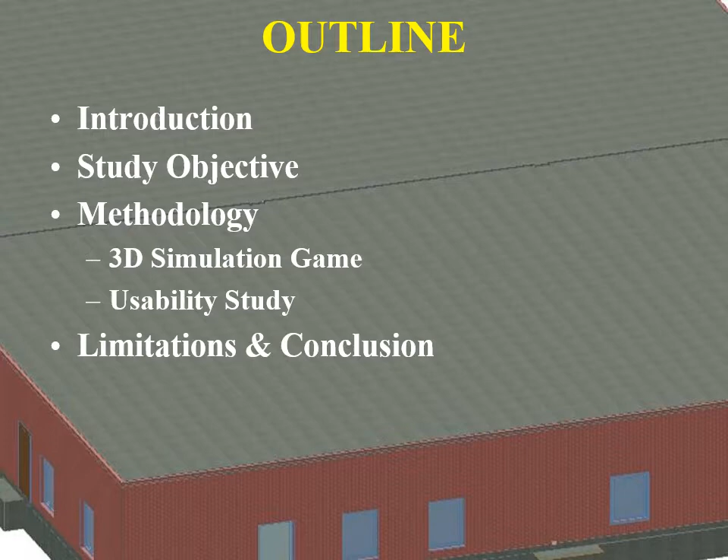Coming to the motivation of this project, I have been teaching this concrete course for some time. This course focuses on design, material takeoff, and construction aspects of concrete formwork. 3D visualization is a very useful tool to teach these concepts to students. One approach to facilitate 3D visualization is to incorporate site visits.

For the last two years, COVID has forced us to adopt online teaching and site visits have been rolled back. Even before COVID, we had challenges incorporating site visits in the class because of scheduling. Because of this lack of site visits, students are not able to visualize these concepts, and it is disengaging the students.

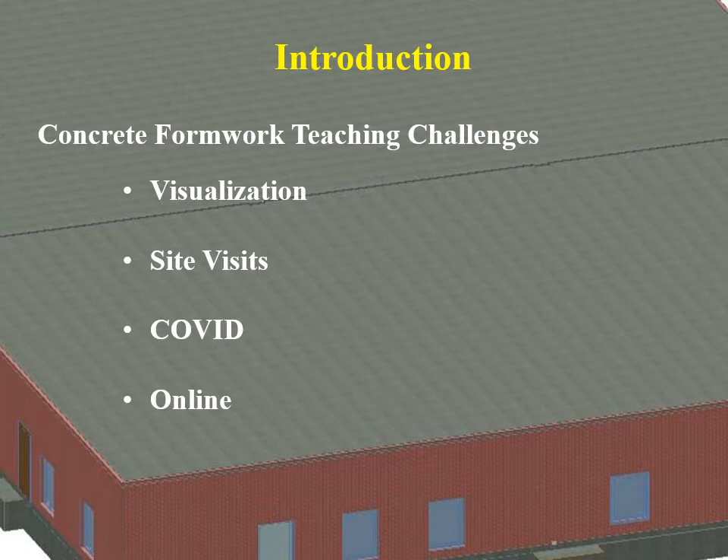So how do we address these challenges? To address them, we thought, let us use a 3D concrete formwork simulation game in the course. What are the advantages of this simulation game?

This simulation game will create visual and kinesthetic learning environments, and it actively engages students in the learning process both in-person and online. This visual-rich learning environment will provide students the required visualization skills and enhance their performance.

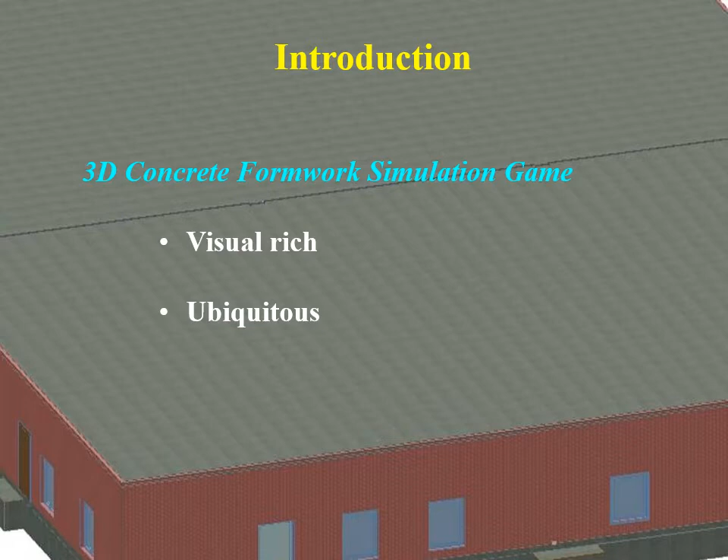This game will help create a ubiquitous learning environment. For example, anytime access facilitates students to learn at their own pace and promotes a learning environment beyond classroom boundaries.

Coming to the objective of the study: to develop a 3D concrete formwork simulation and explore its usefulness in teaching the design, assumptions, material takeoff, and construction aspects of concrete formwork.

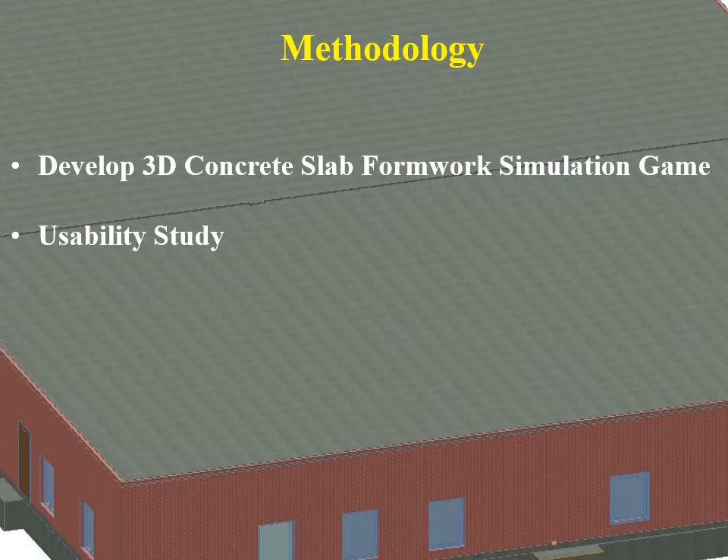So the methodology includes two steps. The first step is developing the concrete formwork simulation game, and then evaluation and usability study. Let us see the development process of this simulation game.

In this simulation game, we developed the slab formwork concrete game. The typical components of the concrete slab formwork include sheathing, supported by a set of beams referred to as joists, which are in turn supported by a set of beams referred to as stringers, and the stringers are supported by a set of vertical members referred to as shores.

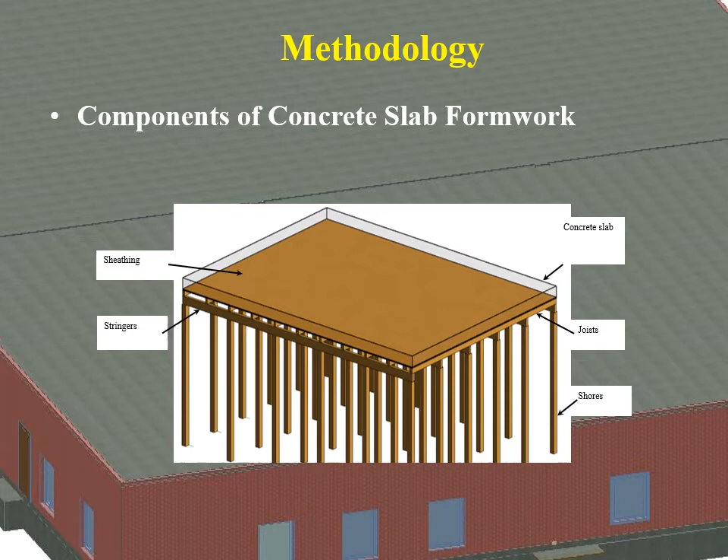Using these assumptions as our case study, we developed the game. In this development process, the sheathing was designed using plywood, and we used lumber for joists, shores, and stringers. The game was developed using Unity 3D software.

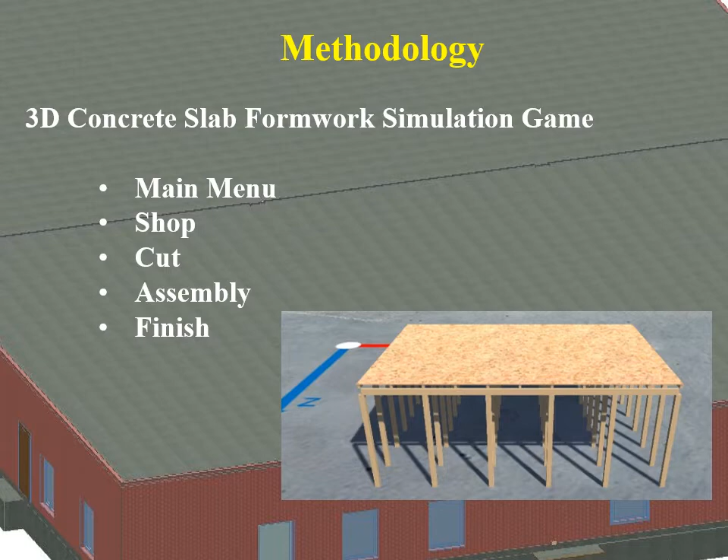It has 5 modules: the main menu, shop module, cut module, assembly module, and finish module. Let's go in detail about these modules.

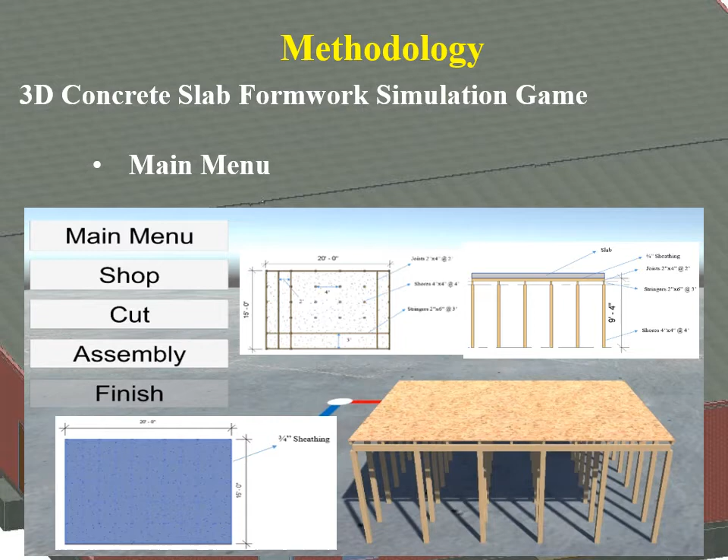On the main menu, when the player enters, this is how it shows—a screenshot where they will be able to see the elevation views and plan views. Using this, the user will be asked to estimate the material takeoffs.

It also judges how well the student maximizes the usage of these components to reduce wastage. For example, the player will be asked to input the amount of each type of material they believe is necessary for completing the formwork with as little waste as possible, without having to return purchased materials again.

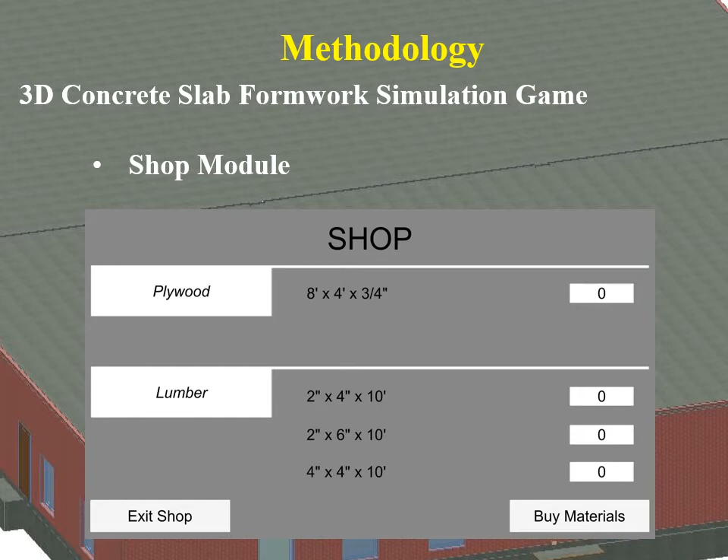The sample screenshot is shown here, where students will be able to enter the quantities of these different materials. Once they enter, they will hit the buy materials button.

Once they purchase the material, they have an option to go to the cut module. This component will help them cut the material to the required sizes needed to build the formwork, so players must account for the excess material needed for proper construction.

Based upon the purchased materials from the shop module, the player is presented with the amount of materials purchased. Using these materials, they will be asked to cut whatever lengths are needed, entering the sizes of the materials and the number of pieces they want to cut.

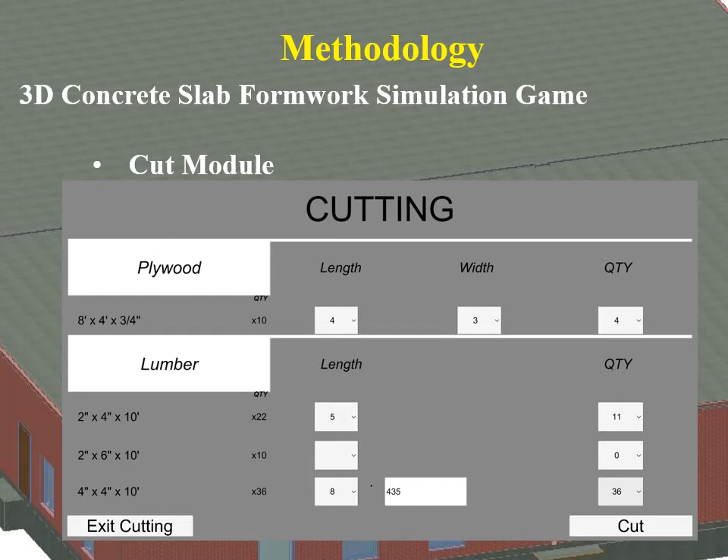The material stockpiles will be dynamically updated as the player utilizes the material. To guide students on where material has to be placed, a ghost image of those components is displayed in blue color. When the student snaps the component, the material changes to its assigned color on those components.

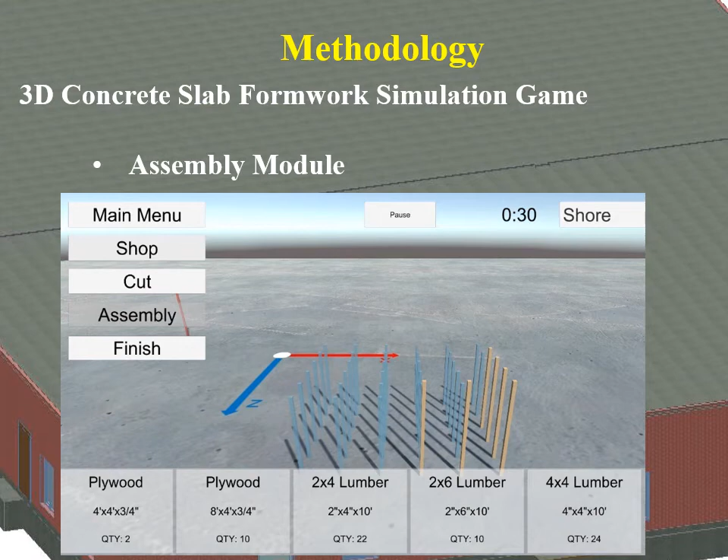The player will have an option to go to the cut module or shop module depending on their needs. However, each visit will contribute toward a penalty. So, coming to the results module, it will be able to show the results of those.

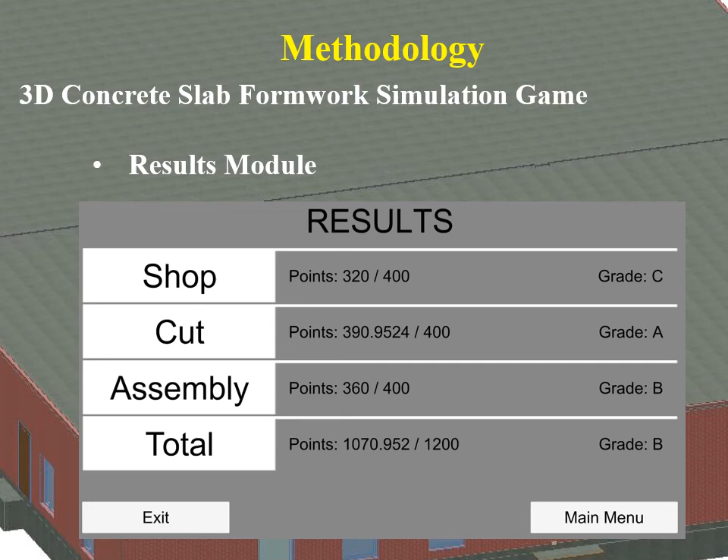The game has been evaluated by conducting different play test sessions. We conducted around 12 play test sessions, and the students were asked to play the game and then take a survey.

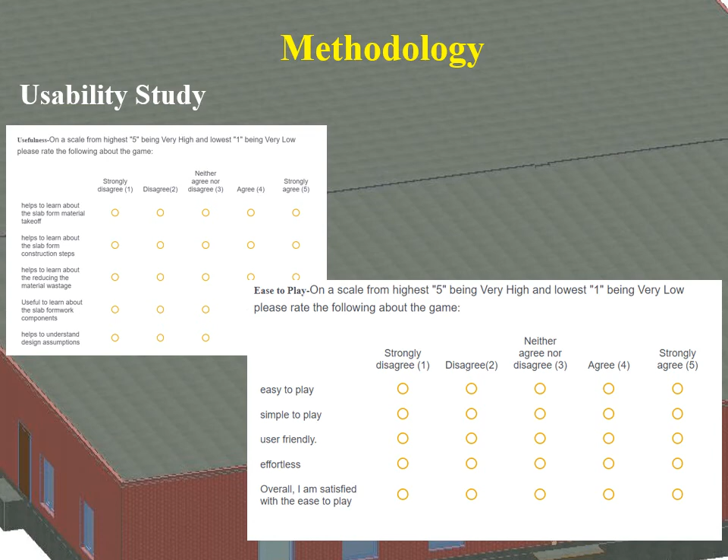We asked them to assess the usefulness of the simulation game, and they were asked to rate their satisfaction on a five-point Likert scale, where 1 is strongly disagree and 5 is strongly agree.

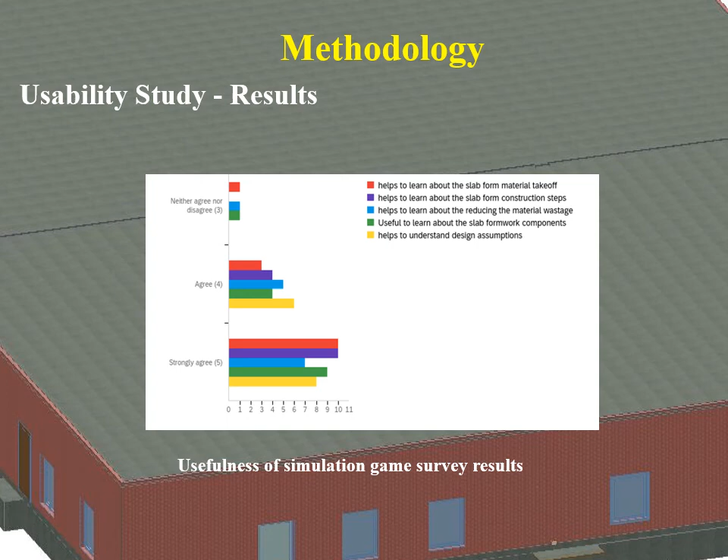The survey results show the usability study results like this. As seen in the figure, most of the students agreed on the usefulness of this game in learning their concepts about formwork.

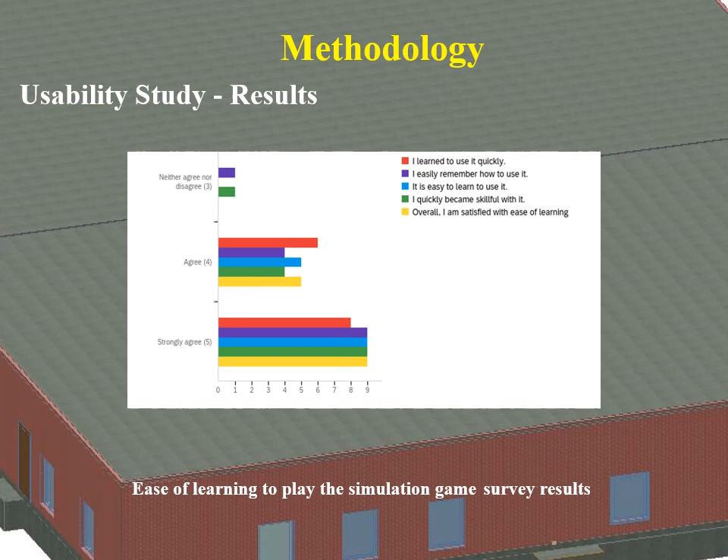Coming to the limitations and conclusion, this game has been evaluated using only 12 test sessions, so more evaluation is required by playing more test sessions. Currently this is simulating only the slab, so further studies are required to expand this to different components of wall formwork and column formwork.

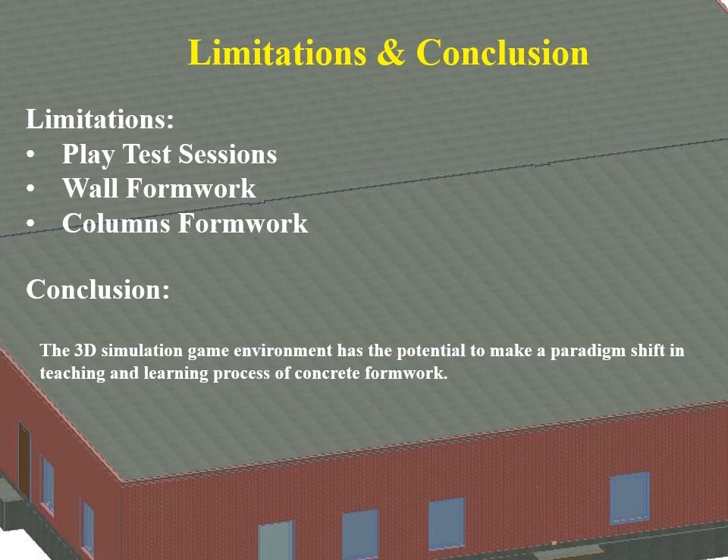In conclusion, this 3D simulation game has the potential to make a paradigm shift in the teaching and learning process of concrete formwork. This will be a learning step to design further components. Thank you.